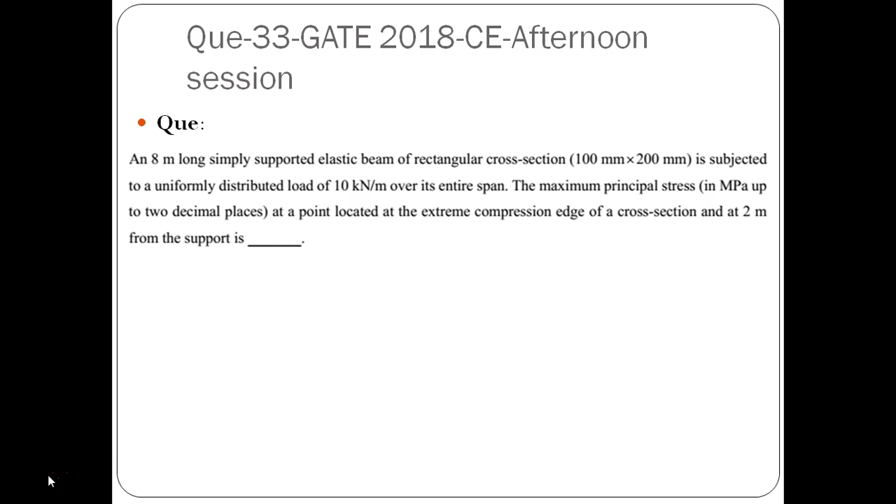So this is what we have to calculate. So student has to recall the concept of principal stress and accordingly he has to solve this particular problem. So difficulty level is somewhat difficult since student has to solve this particular problem within a minute or two. So question setter wants to know whether student can solve this kind of question within a short period of time.

So length of the beam, that's L equals 8 meter, while dimensions of the beam are given as 100 mm by 200 mm, width equals 100 mm and depth equals 200 mm. While UDL, that is W, equals 10 kN per meter, maximum principal stress at a point which is located at the extreme compression edge of cross section and which is 2 meter from the support. This is what we have to find out.

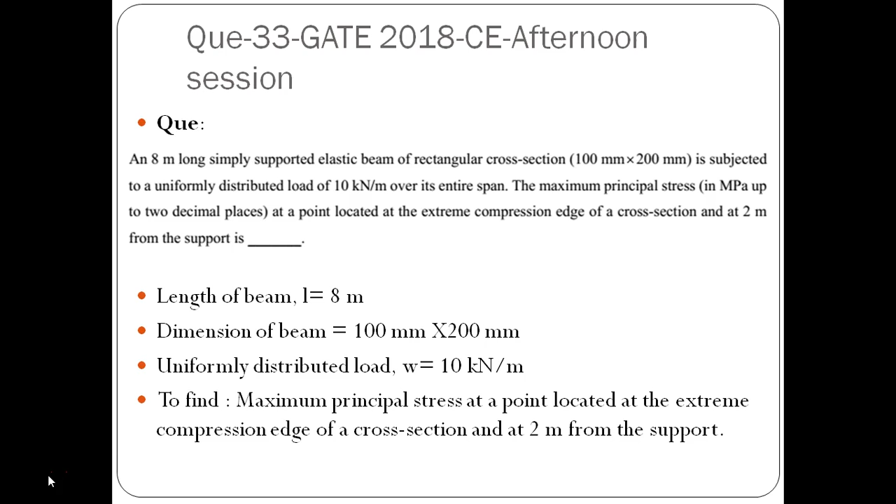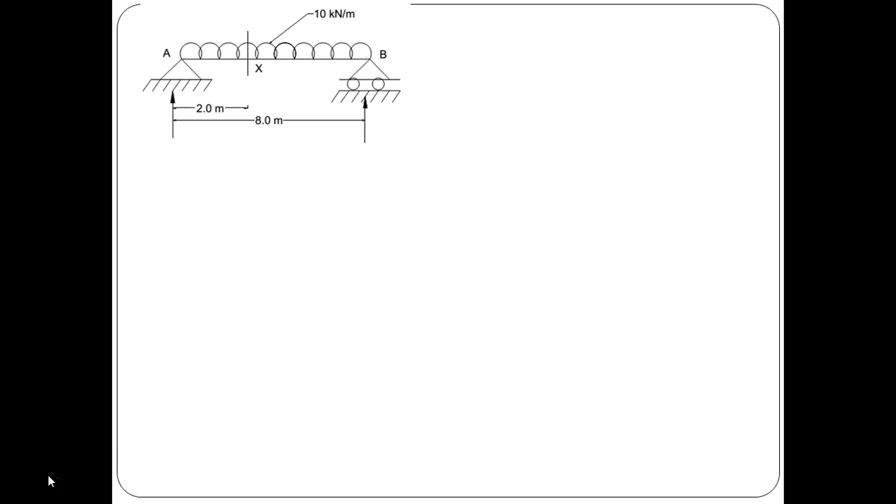So if we just see this diagram, we can easily see this particular beam having a UDL of 10 kN per meter, and we have to calculate this particular stress at 2 meter from the support. So let us take it from the left hand support, section X, with the beam having a length of 8 meter. So simply we have to take the moment about point X.

If we just take the moment about point X, it's a very simple moment calculation: Mx equals minus VA, so reaction at support point A multiplied by its distance 2, plus W UDL multiplied by 2 into 1. So that's 2 by 2.

So now we have to calculate the reactions, that is VA plus VB equals 10 over its entire span. So 10 multiplied by 8, that is equal to 80. Now since symmetrical loading, twice VA equals 80. So we'll get reaction at support point A and point B equal to 40 kN each.

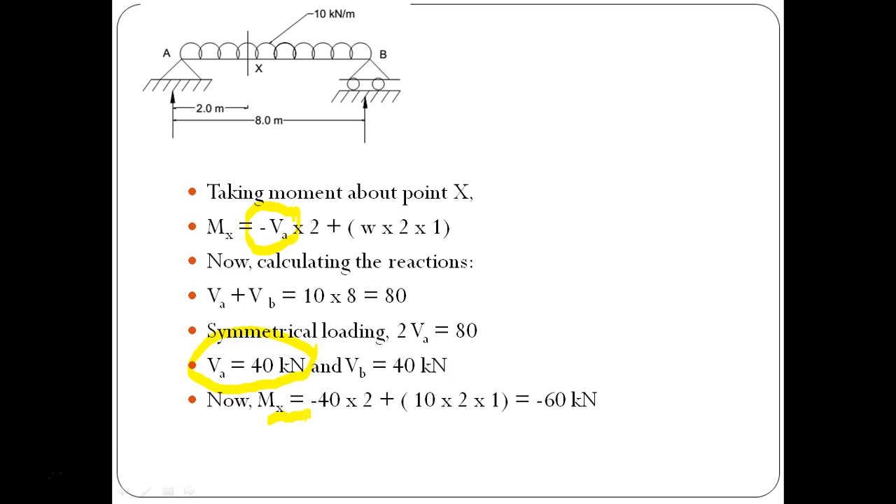So this particular value of VA is to be put into this equation, and we'll get Mx equals minus 40 into 2 plus W, that is 10 into 2 multiplied by 1, that is equal to minus 60 kN meter.

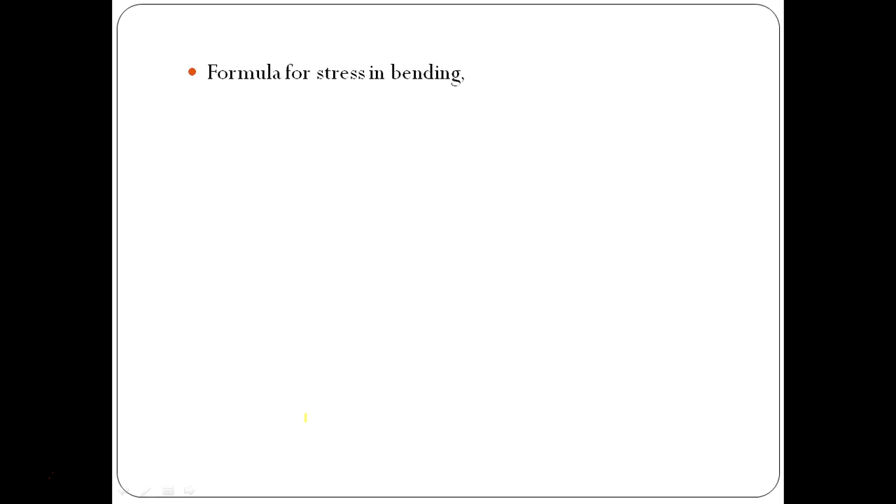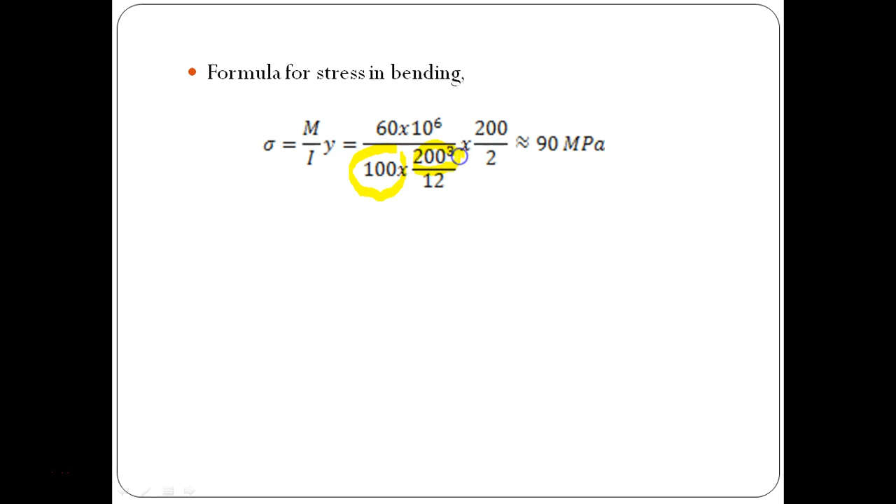Once we calculate the moment at X, now we have to check the formula for stress in bending, that is sigma equals M by I multiplied by y. So M, the value of moment which we have just calculated, 60 kN meter. We convert it into Newton mm, so that is 60 into 10 to the power 6, divided by I. Since it's a rectangular cross section, I equals BD cube by 12. So this is B, this is your D, and y equals D by 2, so 200 by 2. That is coming out to be 90 MPa, or 90 Newton per mm square.

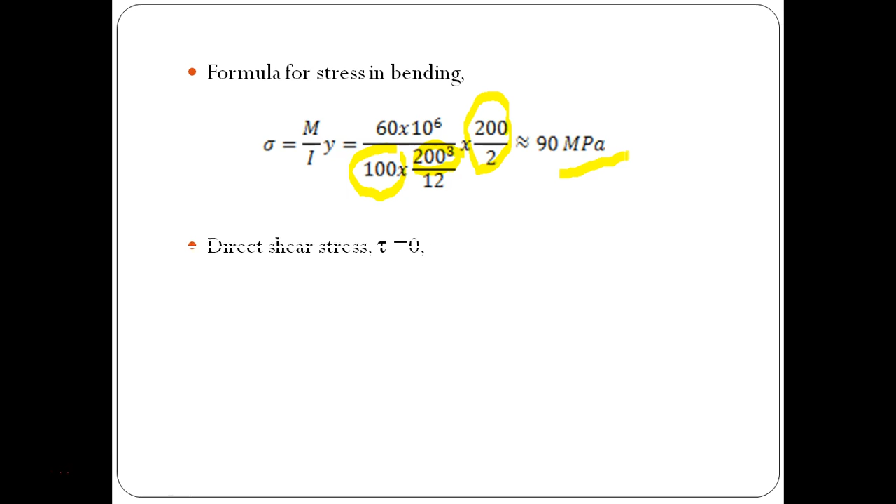Now since direct shear stress tau equals 0, we can say the maximum principal stress at a point located at the extreme compression edge is equal to 90 Newton per mm square. So this is the final answer.

So in this particular problem, student has to take the moment at section XX. He has to calculate the reactions at support points A and B. Once he calculates them, he has to put those values into the equation of moment. Now for stress in bending, the formula is sigma equals M by I multiplied by y. Now you have to consider the units properly. You have to insert the units properly for the values of M, I and y. Once you insert those, we'll get the stress in bending.

Now since we know this concept, once you know that direct shear stress tau equals 0, we can consider that the maximum principal stress will be 90 MPa. That's the final answer.